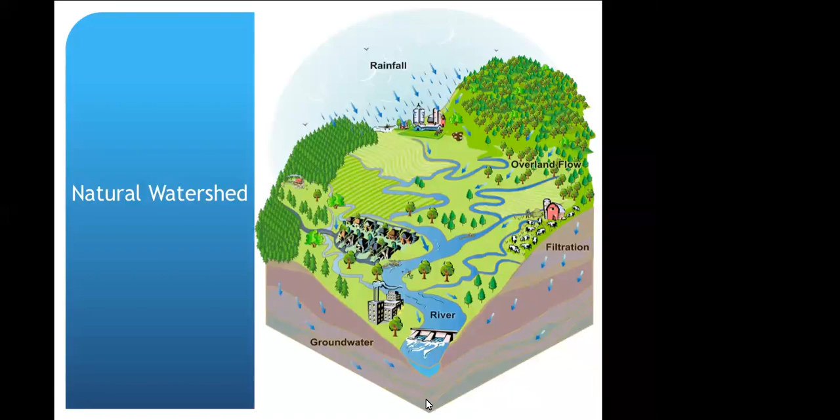My apologies with the, okay, here we go. So,

So in cities, we tend to treat stormwater as a problem. We pave it, we pipe it, we pollute it. And what we really want to do is slow it and spread it and sink it. We want to try to treat stormwater as a solution, as a resource, and not a problem.

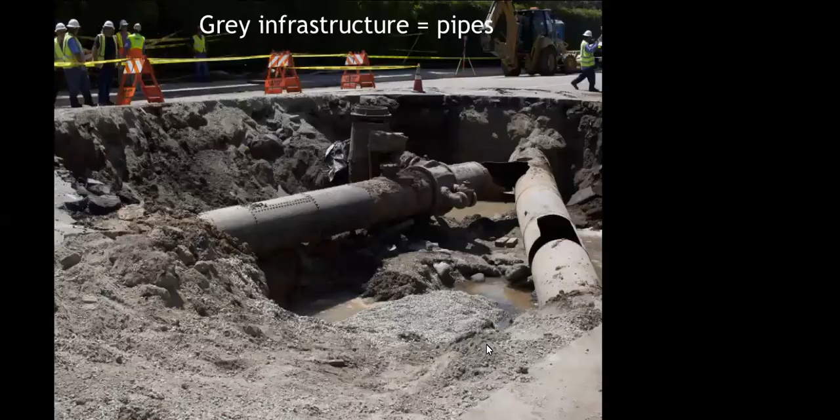So here is a nice photograph of gray infrastructure, pipes. And you know, pipes are really important water infrastructure. It's an easy way to move water around, but we need a parallel system to naturally manage water in cities and provide that buffer zone. Green infrastructure can do that. It makes urban environments more alive and more resilient.

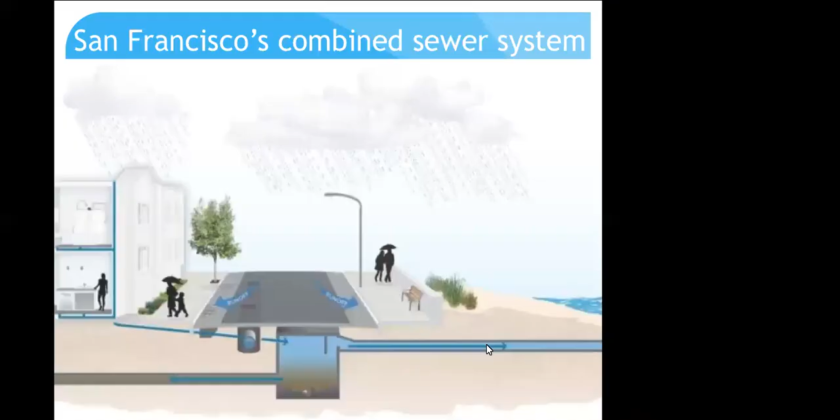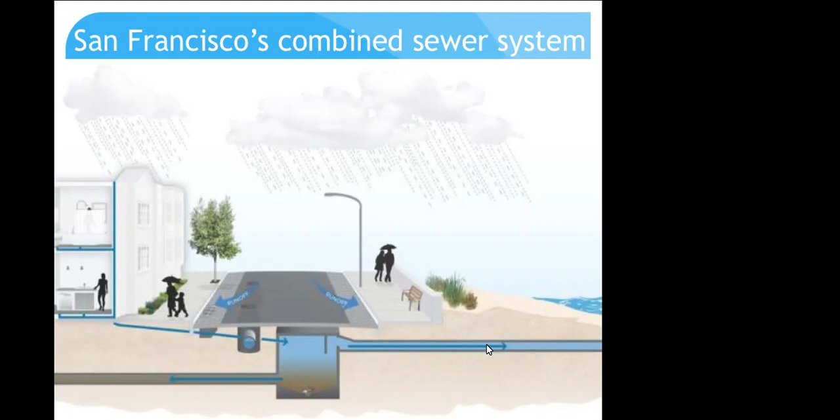So here is another reason too, in San Francisco especially, we have a combined sewer system. So the stormwater on the streets is combined with wastewater from our homes to be treated in the sewer system, which is really great most of the time. But in heavy rains, the system gets overwhelmed and it can't handle all that water at once.

So sometimes we get overflows of partially treated sewage that goes into the ocean. We just can't handle all the water that comes in sometimes. That's why it's really important to hold the water back from the system whenever we can.

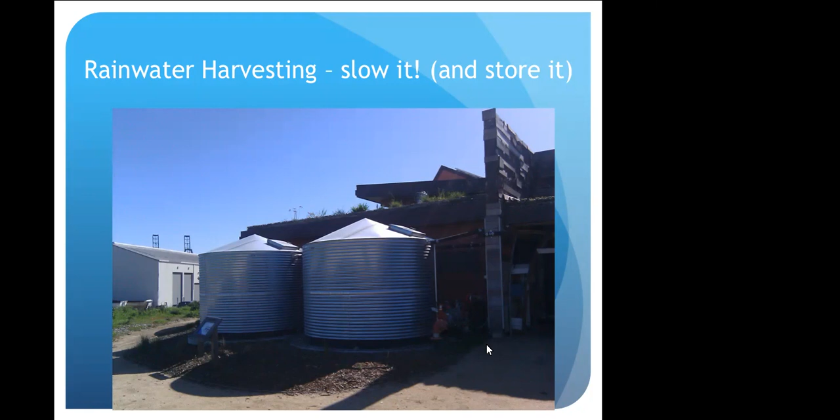And so managing stormwater with green infrastructure helps to spread it and sink it. A passive way to capture that rainwater is to build these special rain gardens on the side of the streets and let the water flow into that. And then that water can slowly infiltrate. It creates habitat. It reduces flooding. It helps to keep our stormwater out of the sewer, and it recharges our groundwater like a natural watershed.

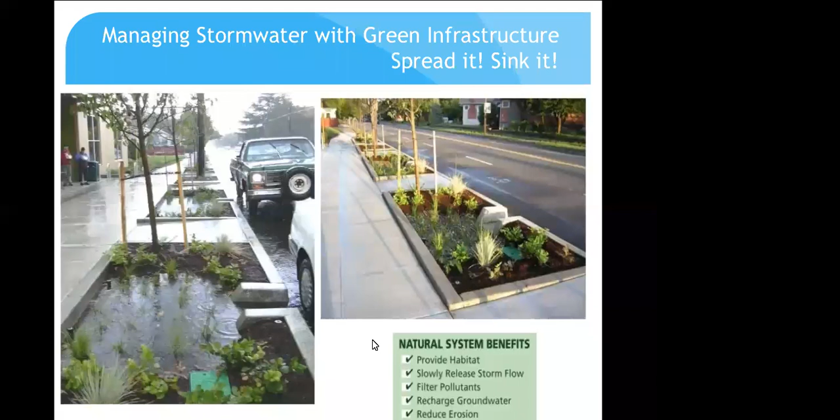This is a slide from the Portland Green Streets program, because they get a lot of rain out there. The goal here is to kind of reorient people and make you think about having cities that behave like sponges. And we can make our cities become more like sponges and mimic natural watersheds by green infrastructure techniques like rainwater catchment and other things that are really nice. I'll show you this next slide here.

You could have a green roof that slows water. You can put a bioswale in a parking lot. You can do a creek daylighting restoration project. Make sure that you have really water efficient structures and a lot of good open green spaces, and of course, harvesting the rain.

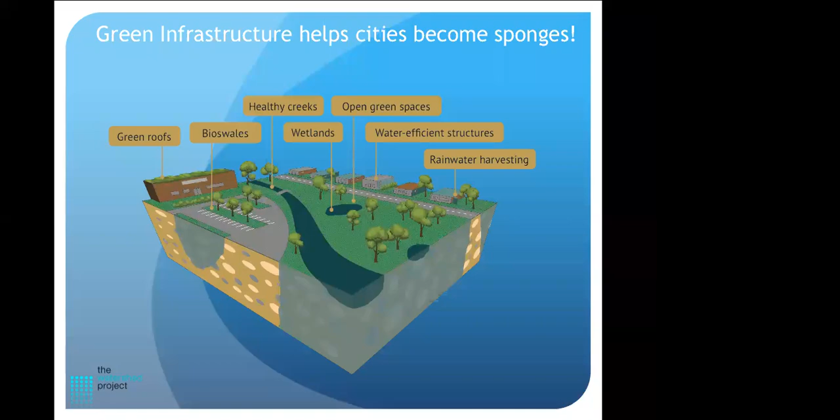So the goal here is to make you feel like you can be part of the solution. You know, we are faced with so many environmental challenges right now. It's really overwhelming. And whenever you do something proactive, it can make you feel less overwhelmed. So just find something that you can do and do it where you are. That's the most important thing to think about when it comes to your own water use.

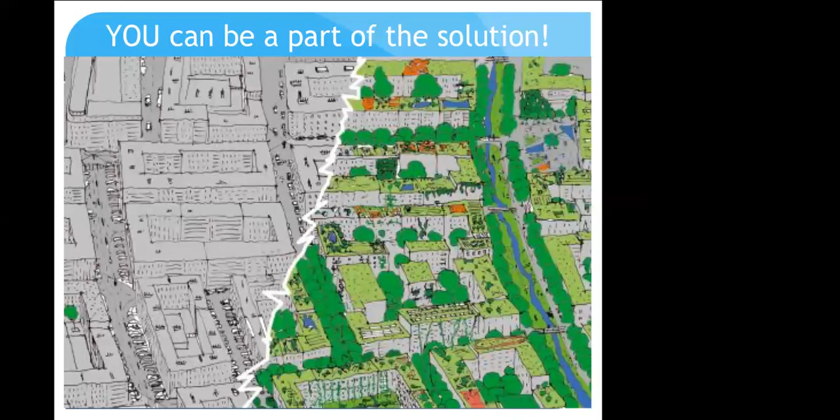You can conserve, you can capture, you can think about gray water systems, rainwater systems. You can make a rain garden. And these things just help keep you tuned into water a little bit more. And then you'll notice that you change the way that you use water. You conserve a little more when you think about it.

So because we get all of our rain in the winter months, a lot of people say, why even harvest rain in the Bay Area? Well, you just saw that we have a combined sewer system, and so that's really good to take the pressure off of our municipal system. But you can also irrigate the plants that you have in your backyard, at least partially. It won't last you all summer long, but certainly it's nice to kind of cut into that water use.

It reduces flooding whenever there's rains. It also, especially in the East Bay, can reduce erosion and pollution from local creeks that lead down into the bay. And there's the potential also for indoor use for toilets and laundry. That takes a plumber for an installation, but it's actually a great way to make buildings work for us.

Capture that rain and use it to flush toilets. Also, there's public education and public demonstration, which is how I kind of got into this. I was doing rainwater catchment in schools; whenever schools had a garden, we would put in a rainwater system. This is a really simple, easy system that you can see is kind of at a scale that would even work for a home.

This is capturing off of a shade structure at E.R. Taylor. And then here's a bigger cistern in a school. This is Jefferson Elementary, and they did a big project where they depaved part of their playground yard, and then we put in a rainwater catchment system there. And then this is a community garden that was called the Free Farm.

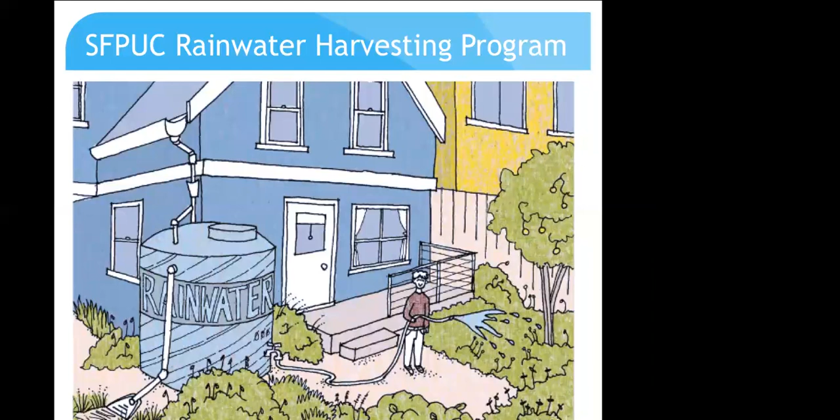And I want to let you know that if you are a San Francisco resident, the San Francisco Public Utilities Commission has a rainwater harvesting program where they will subsidize your rainwater catchment materials. So if you go and sign up online, you can go to the Urban Farmer Store and pick out a nice large cistern if you'd like, and they will give you a discount up to $350, or you could get one or two rain barrels that are just the 50-gallon that are free of charge.

So Urban Farmer is a really good place to talk to. Bring your photos of where you're going to put your system and make sure that you get everything. They have good customer service to help people with rainwater catchment systems.

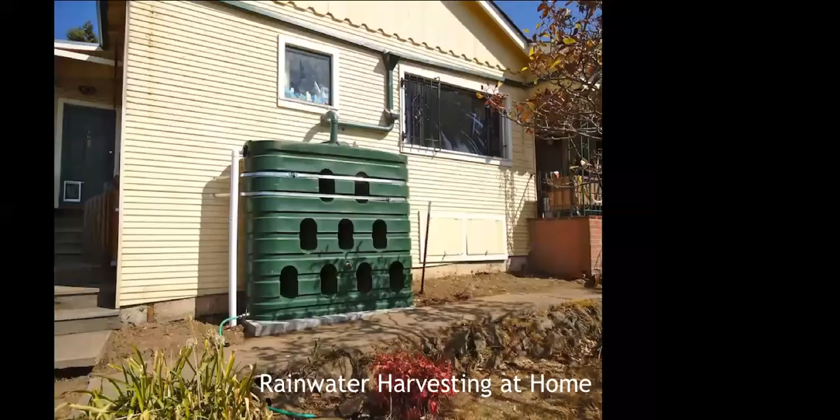But let's take a look at this. This is a nice system that was professionally installed in a home, and you can see that all the components are shown really well. You can see that the roof is pitched, and they're capturing from the gutters on both sides and directing that water in the middle into the tank. You can see too that the tank is strapped for seismic safety, which is really important in the Bay Area.

Also want to note that here at the bottom, you have a nice concrete foundation because water is heavy. It weighs 8.34 pounds per gallon. So when you have a big tank, this is actually a 620-gallon tank, that gets really heavy. And you want to make sure that you have the right kind of foundation underneath it. You don't have to have a concrete foundation. You could do a gravel bed underneath, but you just want to make sure that it's level and it's secure.

And then you can see here in the foreground of the photograph, the overflow has actually been directed to a rain garden that's in process of being built here. It's been kind of dug out. They haven't finished planting it or adding the mulch, but an important part of a rainwater system is to let the overflow go into an area where there's plants so that it can continue to seep into the ground. So I wanted to show you a system here before I mention the components again and talk to you more in list form.

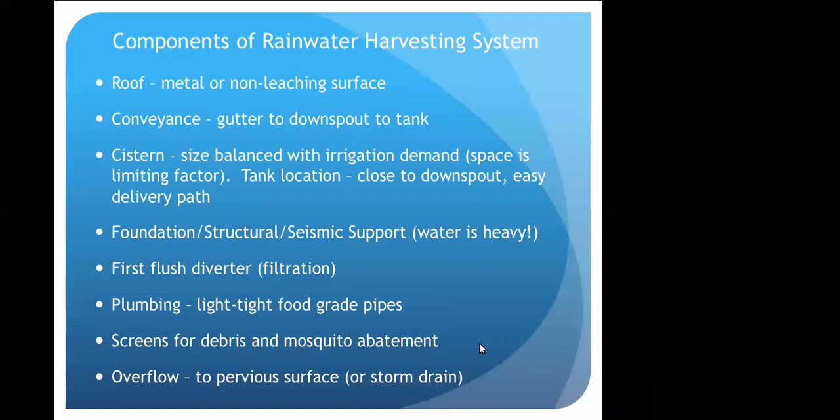And then the overflow to a pervious surface, so it doesn't just go to the storm drain. But if it needs to go to the storm drain, no problem. You're capturing, you're holding, then you're releasing. So let me show you here. I showed you the list, but here's a really nice diagram that's showing all these pieces again. So looking at the roof, you have your catchment surface.

A lot of the times, I go talk to people and they say, I really want to put a rainwater system in our community garden or something. And you look around and there's not a lot of place to actually capture. You need a capturing surface that's near your plants to actually make this work. Then you see the gutter there, and the gutter is going to be sloped to go towards the downspout, and make sure that water is flowing in the right direction.

Then you have the leaf catcher that keeps those leaves out, but you can also put a gutter guard on the top of your gutter to further keep leaves out of the gutter. Sometimes you maybe have a nice big tree over your house, and you want to make sure that the leaves don't get in. So you start with keeping everything out from the gutter, then to the downspout, and then this first flush filtration system that I'll show you.

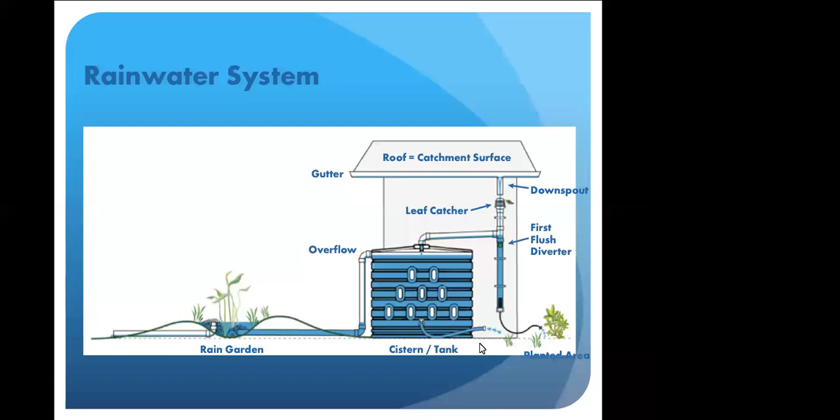So this is a nice diagram of a whole system that's actually overflowing into a rain garden. So let's see, let me show you how this works. So this is just before it's raining. And the one thing I'll just note is that these little bollards here in the front is how this tank is seismically secured.

So that's something that sometimes people do, is pour a little concrete bollard that holds that tank in, especially with this one that's called a slim line. So it's actually not round and short and stubby. It's a taller one that doesn't have a lot of depth. So you want to make sure that something like that really is seismically sound.

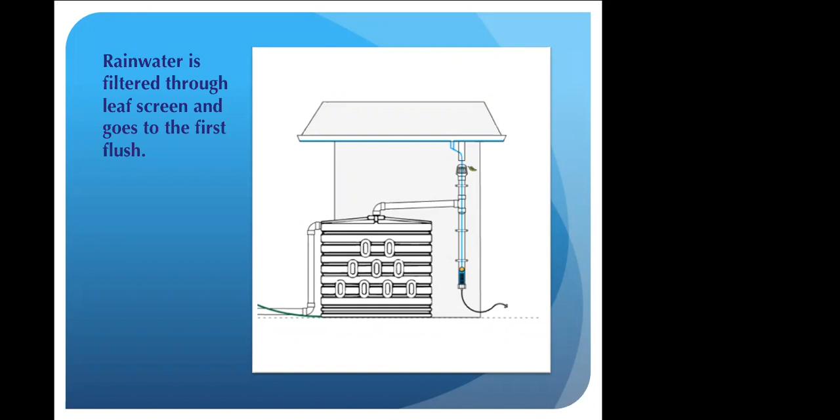So then the rain is starting. You can see it's starting to flow into this first flush filtration system. And so the first flush holds the dirtiest water from the beginning of the rainstorm. You can imagine when the rain first starts, that surface is dirty. So you let this water go into this first flush tube, and there's a ball that's there that rises as the water starts to fill up.

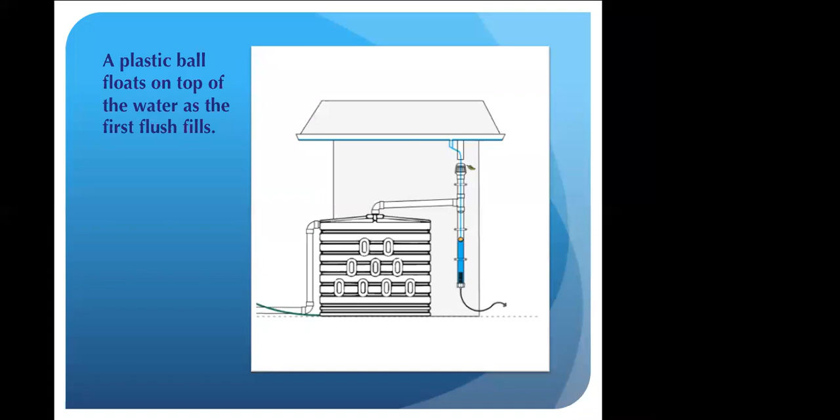And once it gets to the top of where the pipe goes to the cistern, there's a little gasket that it hits, and it closes that off and lets the water start flowing into your tank. So it starts to fill up. Then that cleaner water is what goes in there. And it's just a really simple way to divert the first 10 minutes of a rain or something like that. All that water drains away slowly over time. And then the cleaner water starts flowing into your tank.

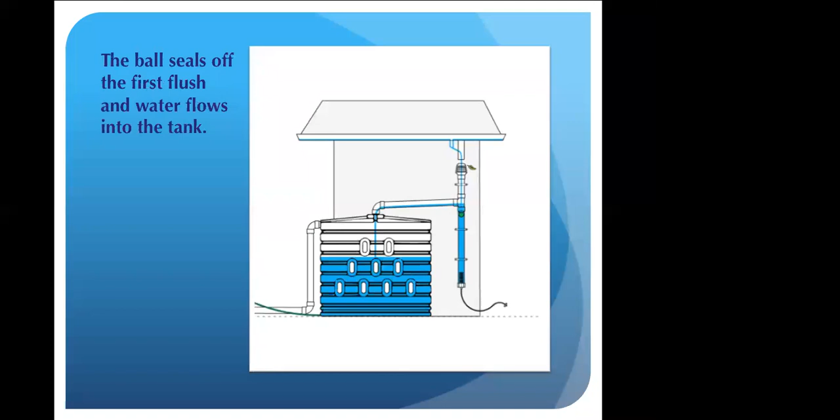And then the important piece here, to keep it all on site if you can, is to have a rain garden that's really close to the overflow, or that can be directed to the overflow. And the good thing about a rain garden is that it also is beautiful, and you want to keep it 6 feet away from your home's foundation, so you don't do anything that could harm your home. But the rain gardens are a really nice way to take all of that rain and make sure that it's sinking into your property.

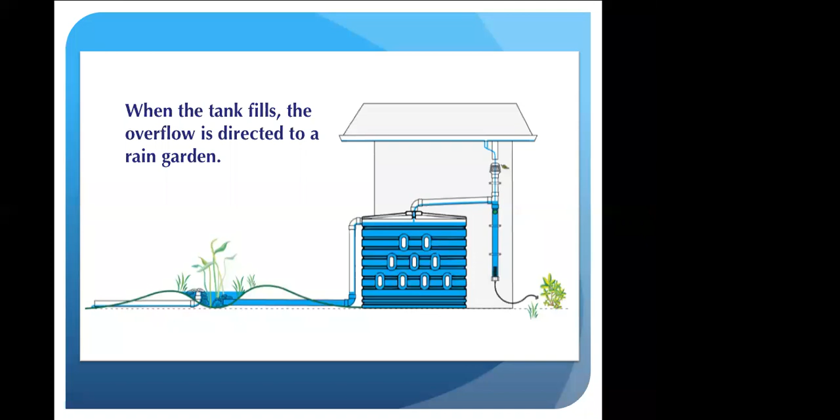So people always want to know about sizing the cistern, and there's a good rule of thumb for that. But before I tell you that, I would just say the main thing is, in California, you want to get as big of a tank as you possibly can, because we're going to have a lot of rain, and then it's not going to rain for a while. So as big as you feel like you could use, and as big of a tank as you could get through your gate is a good size.

But so the rule of thumb is 0.6 gallons per square foot for 1 inch of rain on a rooftop. So if you have 1 inch of rain on a 1,000 square foot roof, you can collect 600 gallons of rainwater in that 1 inch rain. And for the Bay Area, we average 23 inches of rain per year.

And so the equation is, let's say for a 1,000 square foot roof, that's those bungalows that I showed you at the schools. You see those at schools all around San Francisco. Those are about 1,000 square feet. If you take that 1,000 square feet times 0.6 times 23 inches per year, you get over 13,000 gallons of water per year. That's a whole lot of water that we could be saving and reusing.

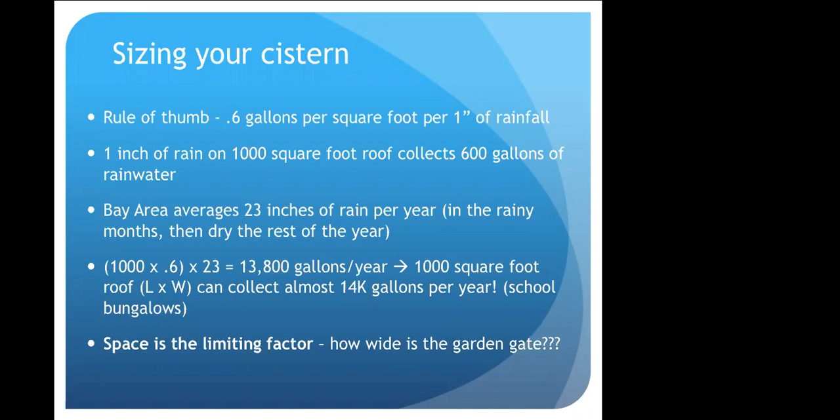And then the maintenance of your rainwater system is really pretty simple. You want to just keep those gutters and screens clean. You want to clean your leaf filter. You want to make sure every fall before the rainy season starts, clean out your gutters, rinse the tank out. And then the places where leaks often happen are connection points. So you want to look at the points where your pipes come out from your tank. That's often where a leak will happen.

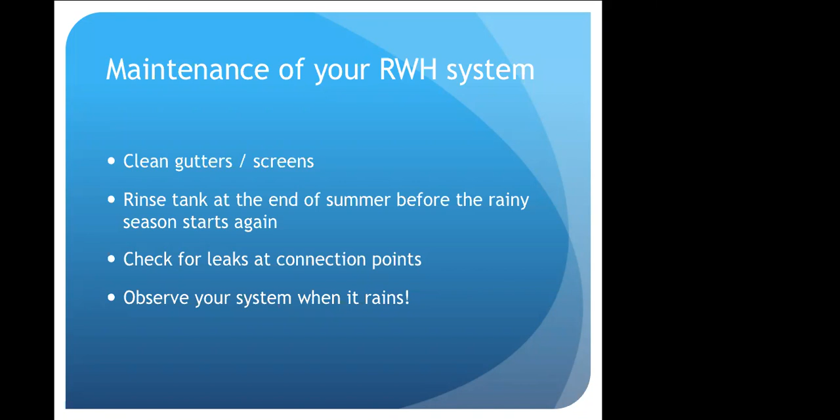And it's great to observe your system when it rains. It's really fun when you put your rainwater system in, then you go outside when it's raining and you can hear that rain falling into the tank. It's fulfilling. You know that it's happening. So I wanted to stop here for a moment and see if anyone had any questions about this, because this is a good time to talk about all the information you just absorbed.

Thank you, Kat. So much great information. We do have a couple of questions coming up in the chat. Great. One of them is around what's the best way to clean out the rainwater barrels? Should you use bleach, or how do you get rid of sediment? What about algae? Well, I have to say that just even rinsing them out really good, sometimes a little vinegar solution, a little diluted vinegar solution.

Just want to make sure that you don't need bleach. Vinegar should be enough if you even need that. I've seen tanks go for years and years without even really being cleaned, and they do pretty well. I would just say that whenever you're draining your tank out, if you use vinegar, just make sure that you're not having that go into your plants, because that's gonna alter the pH.

Be careful with that part. But yeah, any other ones? Yeah, Anne had a comment that she uses roof shingles in a modified bitumen roof, and she's not sure if that water would be suitable for watering plants after it came off the roof. So does roof composition matter for what you can do with the water you've collected?

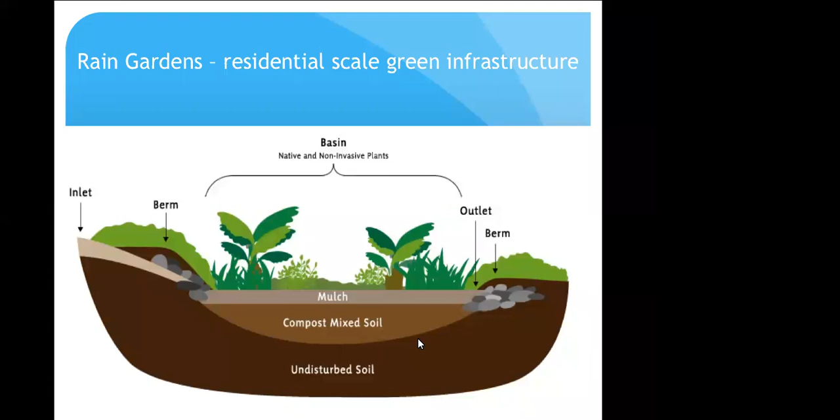You're inviting it in. And so you can see here in this diagram that you dig down, you make kind of a depression, a little ditch. You dig out some soil and you mix that native soil with some compost to amend it. And you put special plants in that can handle having a lot of water come in at once and then drying out in between. And you have your entryway, your inlet that's a little bit higher than your outlet. And let me show you another.

Well, just before I go there, I'll just say that rain gardens and swales and bioswales, oh my, they are a way to help mimic the functions of a natural watershed. So you can direct your runoff into these specially designed landscapes that allow rainwater to infiltrate and percolate into the earth and be cleaned by natural systems, by plant and soil. And so when you say slow it, spread it, sink it, these rain gardens help you to sink it.

And you've seen some curb cuts probably around the city of San Francisco that direct the stormwater into these little rain gardens. There's also something called bioswales that are a little bit more engineered because their overflow is connected to a drain. So when it gets too much water in the bioswale, it actually can go into the sewer system as an overflow mechanism. So that's a little bit more engineered.

But I'll show you this really nice diagram here of a rain garden. And just to say that one thing that's missing here is that it would be great to have a rainwater tank right around here and then have the overflow go into this rain garden. But rain gardens are great for downspouts. A lot of the time people just do a little downspout that they direct to a rain garden, and that can just help to keep the water in, percolating into the ground, but not have it be flooding.

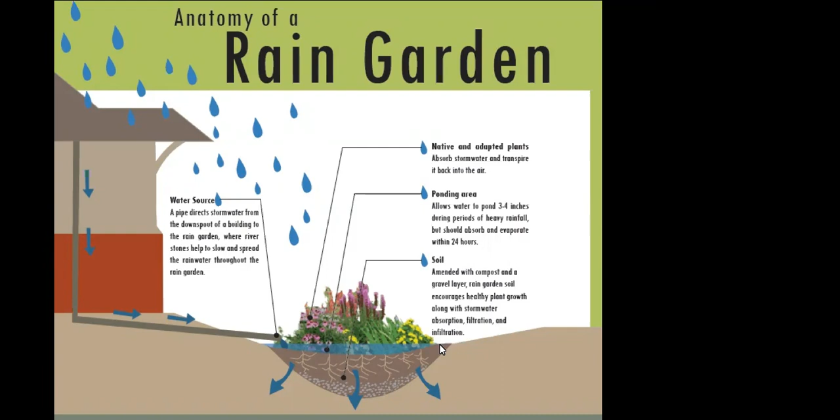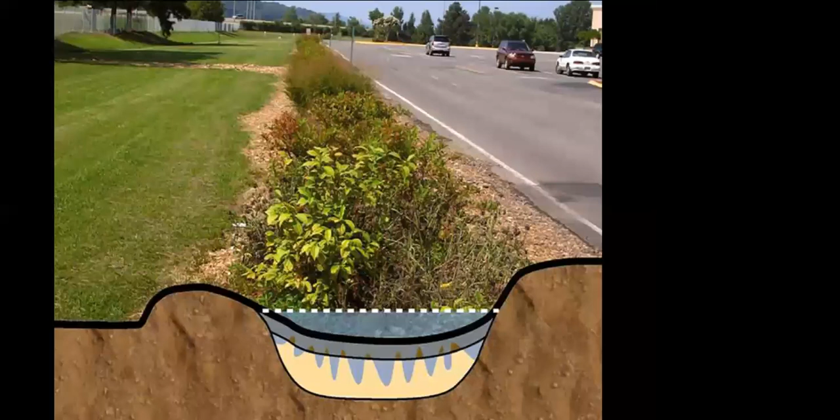And another thing that rain gardens, swales, can do is just be a buffer zone. I mean, look at this. This is not California, this is in Alabama, actually, so it's not a California plant palette. But I wanted to show it to you because it's just a really nice way of showing how if you have these plants along the side of the street, it can just be a good buffer zone and just hold that water in.

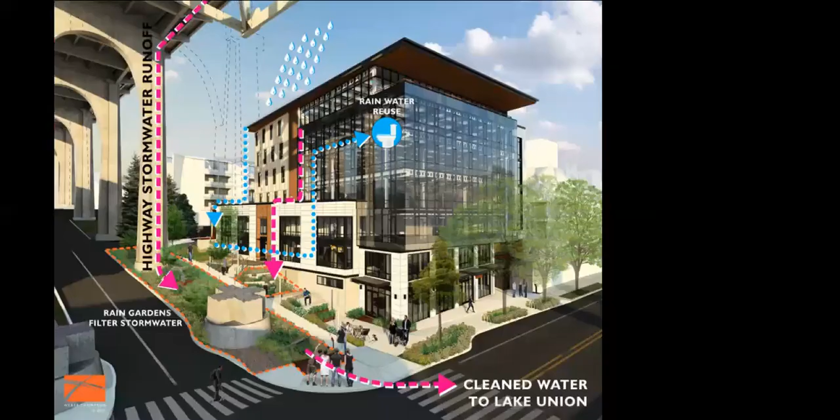And then I want to show you something that I think is a real inspiration. This is actually a project in Seattle, the Aurora Bridge. Look what they've done. They took stormwater from a bridge and directed it into green infrastructure, a big planted area, and they're cleaning that water before it heads back into the natural body of water. And you can notice here too that they're capturing rain and making it go to toilet flushing as well. So this is something that we can work towards. This is big vision. This is what we need to be doing to scale up this kind of idea. And you know, it's been done.

So as we look at ways to mitigate freeway pollution, this is one way to think about it. Create special landscapes that are going to take that water and clean it so it doesn't pollute the natural body of water, because that's often what's happening: the water from the freeway with all the car asbestos from the brakes and all the heavy metals is going right into waterways. And that's something that we can stop if we slow it and spread it and sink it.